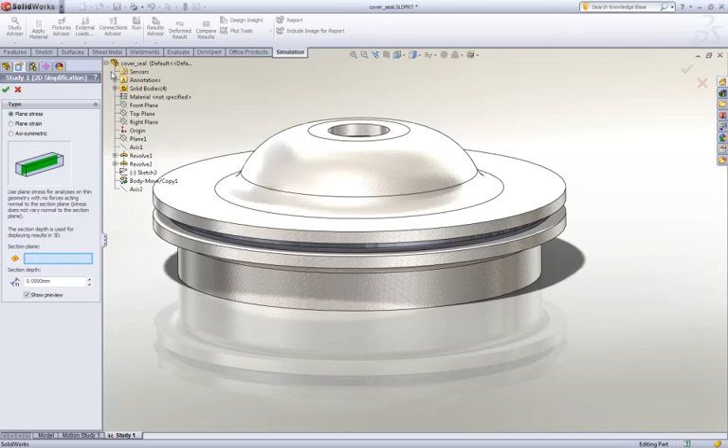When we create a study in SolidWorks Simulation, we now have the 2D simplification option. If we select that, all we need to do is pick a plane that we'd like to slice our model with. In this case, for something that's a revolve, I can use axisymmetric to get a simple slice of the revolve profile. I can then use this profile to check out the performance of our design. So let's just have a look at that.

So you can see here we have our seals and our top and lower plates. As for any other model, all the material properties come across automatically for us. All we really have to do is define a couple of additional contacts between the edges that are going to touch, and we'll do that for the other seal as well. And that's really all there is to it that's different.

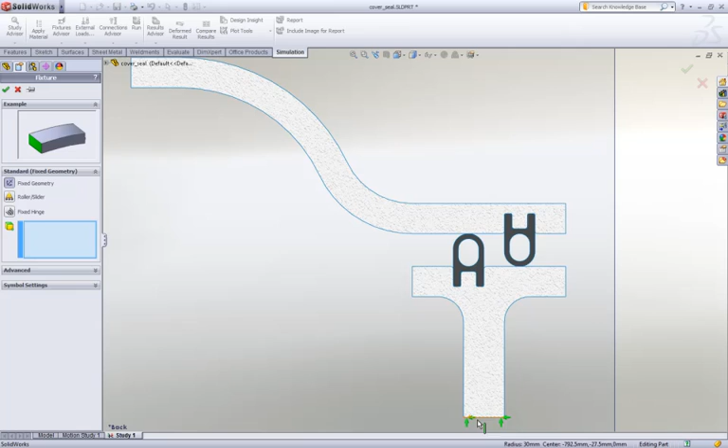We apply a fixture to hold our geometry as we would normally, and then we apply some way of applying the load. In this case, what I'm going to do is pull down on the top 10 millimeters to clamp our system. Again, great visual feedback to understand what's going on there.

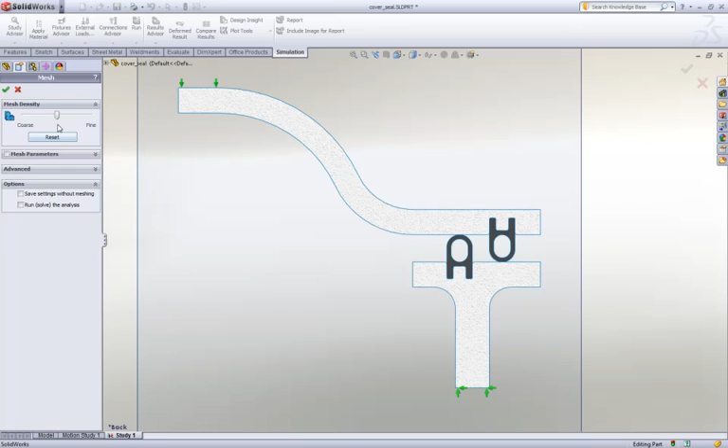One of the great things about doing a 2D simplification is that we can really provide a very refined mesh with very little overhead. There's just no way you could come in and do a solid model of this design and get results in a reasonable time frame, as well as when you look at the amount of memory and disk space it can consume. So 2D simplification is a real time saver and actually can give you more accurate results than you can achieve with a solid model. And if you think of that with nonlinear analysis, that's a real big time saver.

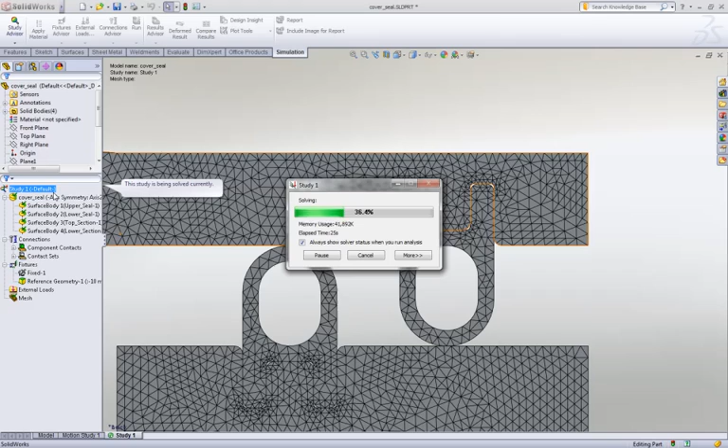So you can see this one only takes a few seconds to solve. It's not bad at all, and the same sort of benefits apply to any form of analysis. And 2D simplification is supported for thermal as well. So you can see here we have our results. We've got this deformation. We can animate the results.

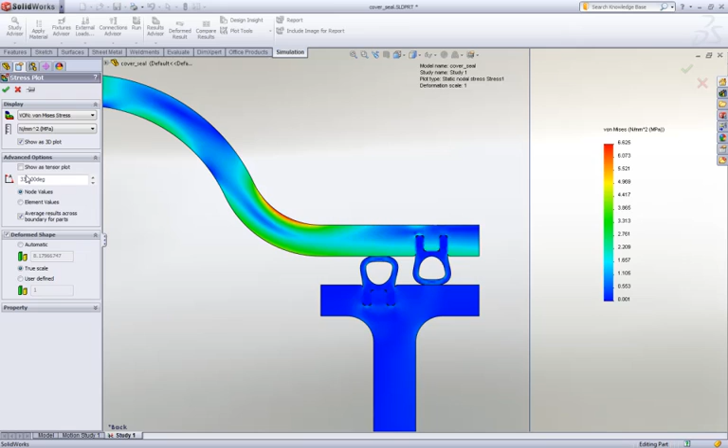Not only that, we can even control the results view to actually show it on a solid portion of the model, which is great for assisting in visualizing what's going on. And it's not just a static image. Again, we can animate that. So again, it's great feedback to enable you to look at different elements. So this is a linear model. Let's have a look at a nonlinear solution.

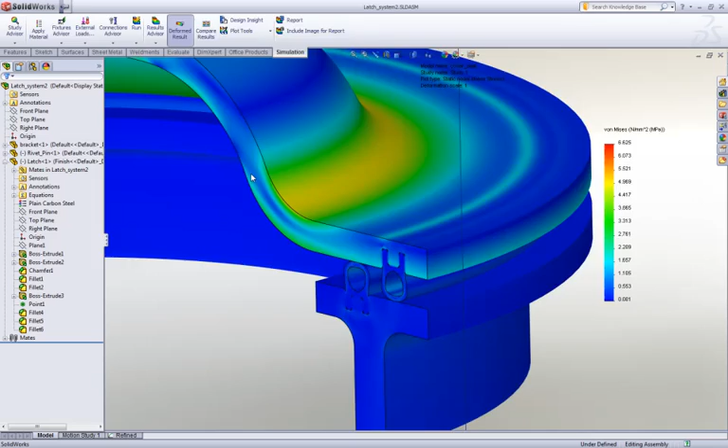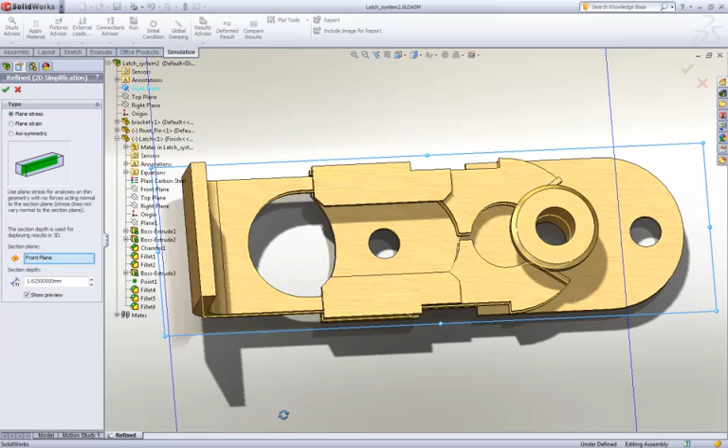Here we have a latch system, and what I'm interested in is the performance of the latch and how it's going to open up as it goes over this pin. Again, we can do a 2D slice to look at the area of interest, which is the latch itself. So let's have a look at that. Again, because these are parametric, you can go in and modify them at any time. So you can see here, that's the 2D profile or the slice we're doing through the model, and all we do is specify the thickness of the area of interest, which is the thickness of the latch.

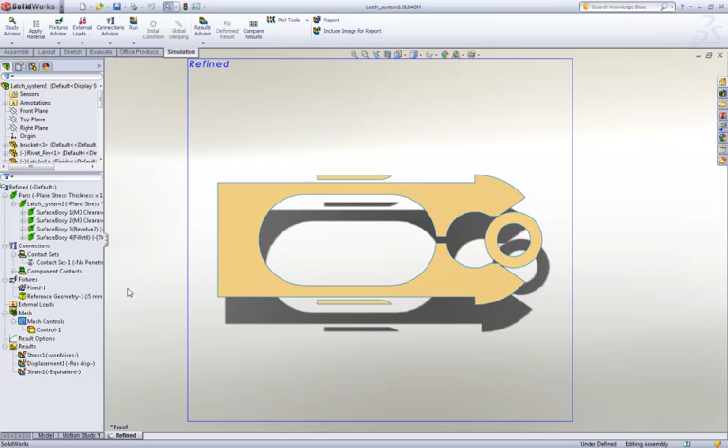Again, materials come across. In this case, we're just doing a global contact, just saying those two bodies cannot penetrate each other. And we've got a mesh control. And again, there's just no way with a solid model you can come in here and do a refined mesh to get accurate results the way we can with planar simplification. So there's our result. Let's animate it. And again, nice visualization. If we look at the solve time for this one, it's only just over a minute.

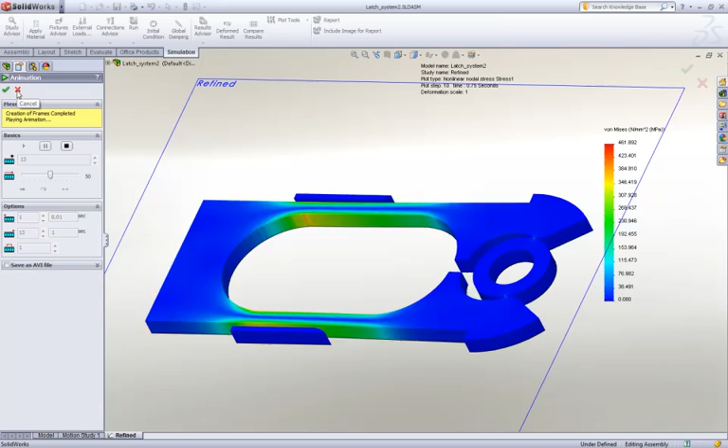And again, same thing. We can show it in 3D as well. So again, it's not only more accurate, it's going to be faster, and that means you're getting the right answers the first time. So planar simplification is going to be very beneficial to those people that have some sort of symmetry in their models and helps reduce the time it takes to get more accurate results.